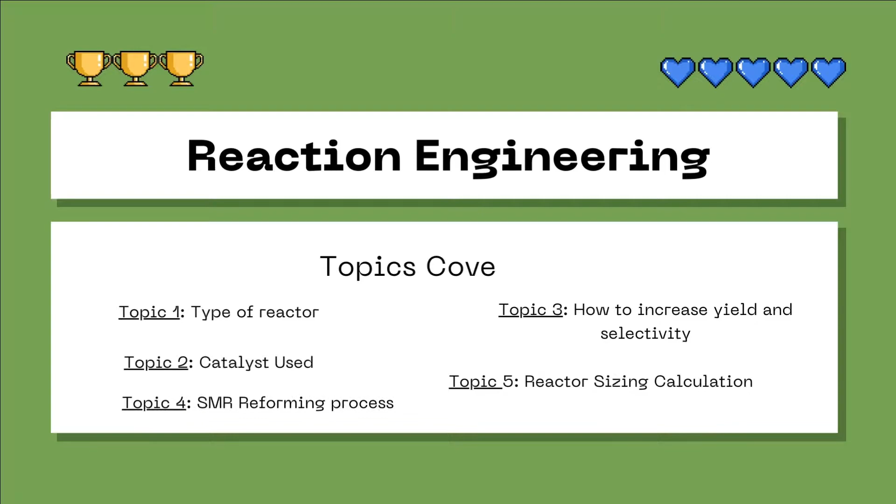For the reactor used in steam methane reforming, the PBR reactor is used in the SMR reaction because the steam methane reforming method requires a catalyst to improve the reaction, so packed bed reactors are frequently utilized for this process. Aside from that, because this project wants to produce a significant volume of hydrogen, the PBR reactor is a better choice than others because it has the advantage of forming products in large amounts due to higher contact between the reactant and the catalyst.

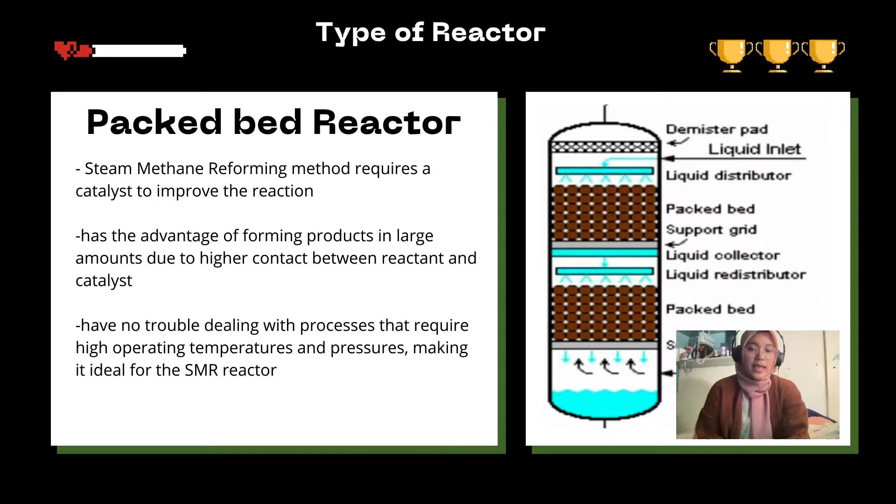Furthermore, PBR will have no trouble dealing with processes that require high operating temperatures and pressure, making it ideal for the SMR reactor, which requires a temperature range between 700 degrees Celsius to 1000 degrees Celsius, and a pressure range of 300 kPa to 2500 kPa.

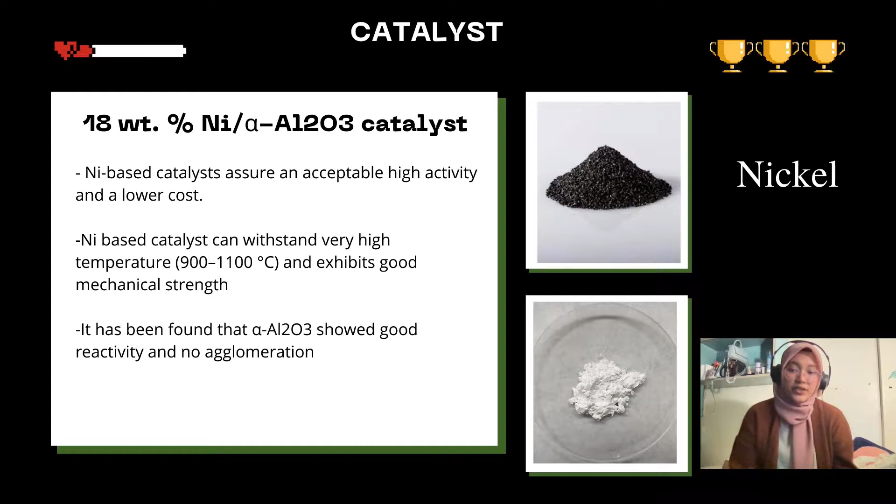Nickel-based catalyst can withstand a very high temperature, which is between 900 degrees Celsius to 1100 degrees Celsius, and nickel exhibits good mechanical strength. The use of alumina-based supporting material has been investigated extensively in literature, and it has been found that aluminum oxide shows good reactivity and no agglomeration. Depending upon the feed used, different metals and supports are used for the steam reforming process.

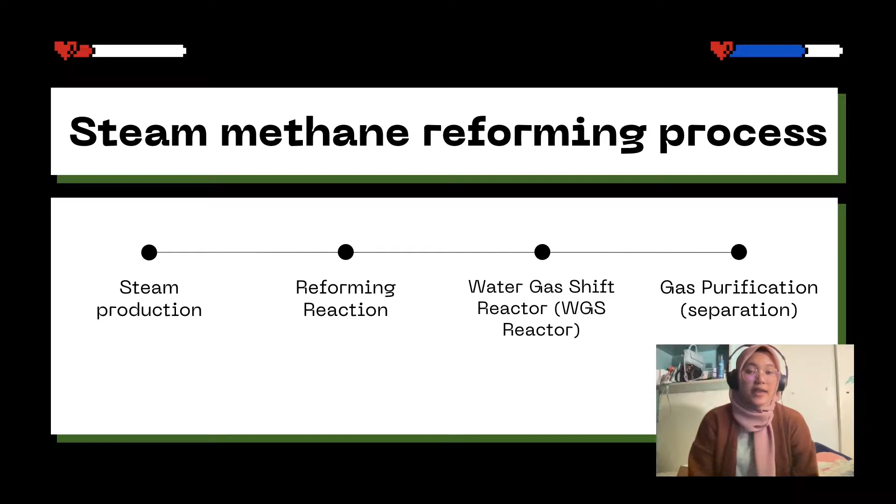Moving on to the next chapter, which is the steam methane reforming process, there are 4 significant steps. The first one is steam production, then moving on to the reforming reaction, then we have the water gas shift reactor, which is the WGS reactor, and the last one is gas purification, which is the separation.

First step, which is steam production: water must be in the form of steam at a very high temperature in order for the reaction to take place. Water enters the furnace as a liquid and is heated to a temperature upwards of 1273 Kelvin, and this high temperature fosters reaction between methane and water to capture as much hydrogen as possible from the process.

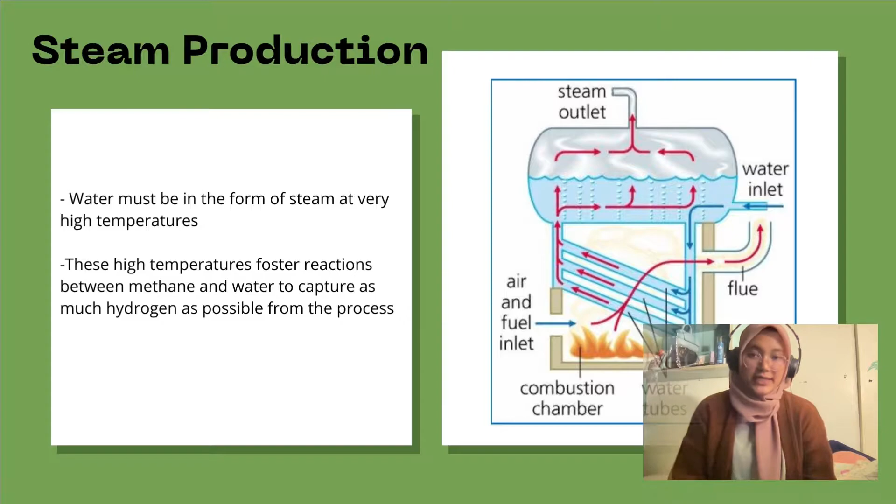For the second step, which is the reforming reaction, steam from the furnace is mixed with natural gas, which contains methane, to start the reaction, and the steam-gas mixture enters the reformer from the inlet manifold. The reforming tubes are surrounded by burners, keeping the temperature of the mixture above 1500 Fahrenheit, and at this temperature methane reacts with steam to produce hydrogen and carbon monoxide.

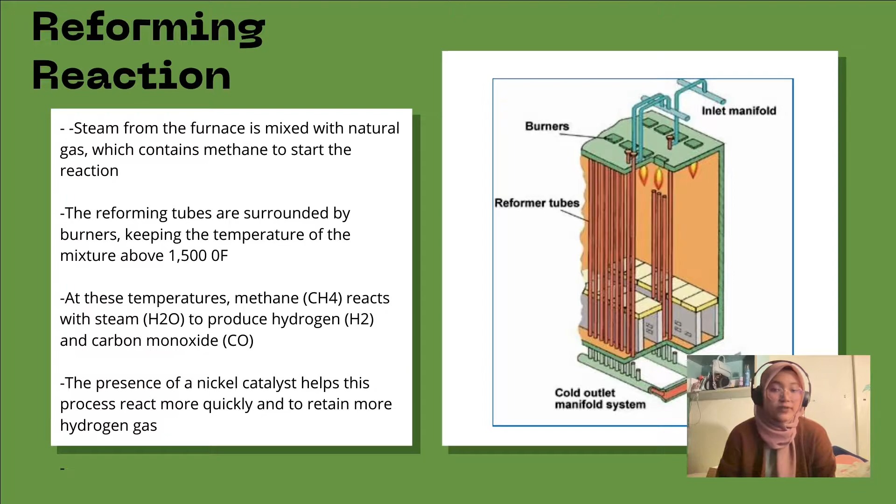The presence of nickel catalyst helps this process react more quickly and retain more hydrogen gas. The hydrogen-carbon monoxide mixture exits the reformer via the outlet manifold, so carbon monoxide is not a useful product of the reaction and may be harmful if released into the environment.

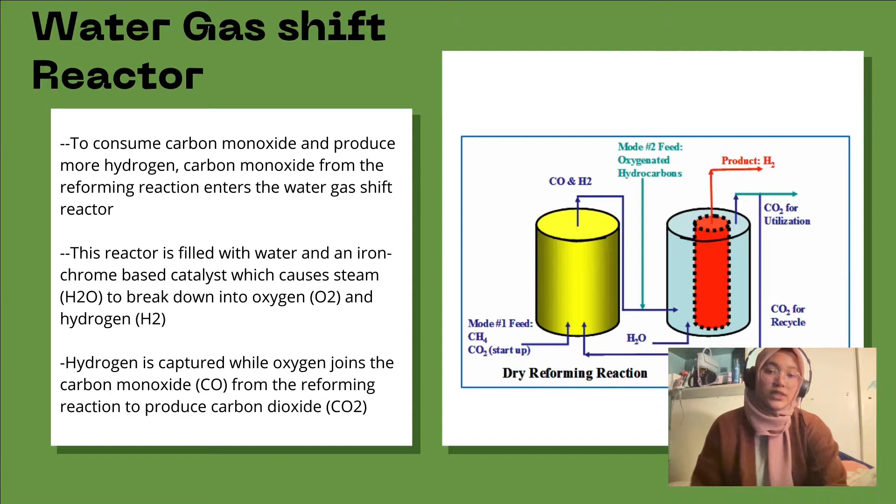For the third step, we have the water gas shift reactor. To consume carbon monoxide and produce more hydrogen, carbon monoxide from the reforming reaction enters the water gas shift reactor. This reactor is filled with water and an iron-chrome-based catalyst, which causes steam to break down into oxygen and hydrogen. Hydrogen is captured while oxygen joins the carbon monoxide from the reforming reaction to produce carbon dioxide.

The last step is gas purification, which is for separation. The gas mixture exiting the WGS reactor is not pure hydrogen and needs to be further refined to meet customer specifications. There are many ways to purify hydrogen, but pressure swing adsorption is the most common in an industrial setting. The gas mixture enters the purifier where specific adsorptive materials trap contaminants at high pressures, so purified hydrogen is pumped out of the vessel, and finally the vessel is depressurized to release trapped contaminants. PSA is used for the removal of carbon dioxide, methane, carbon monoxide, and water from hydrogen.

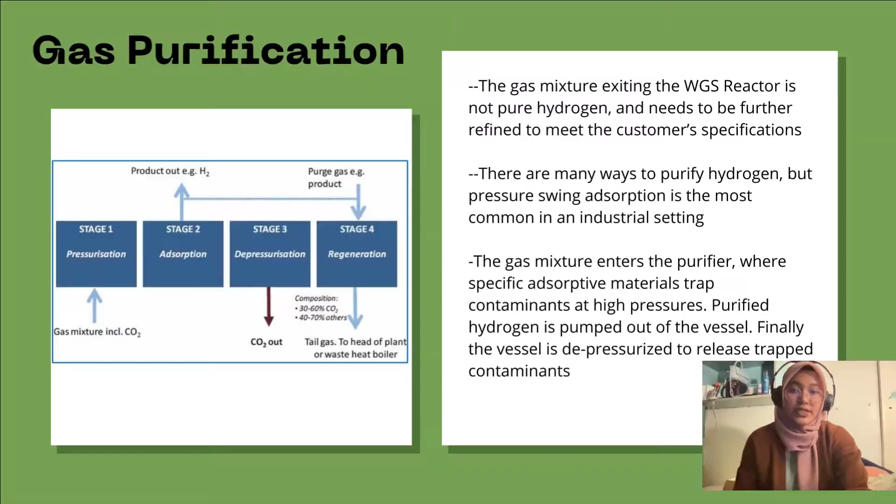Other than that, we can also increase the inlet temperature, which is the reaction temperature when the pressure is constant. Because the overall heat of reaction in this reactor is endothermic, this shows that the whole process absorbs more energy overall. So according to the principle of Le Chatelier's, endothermic reaction favors a high temperature condition.

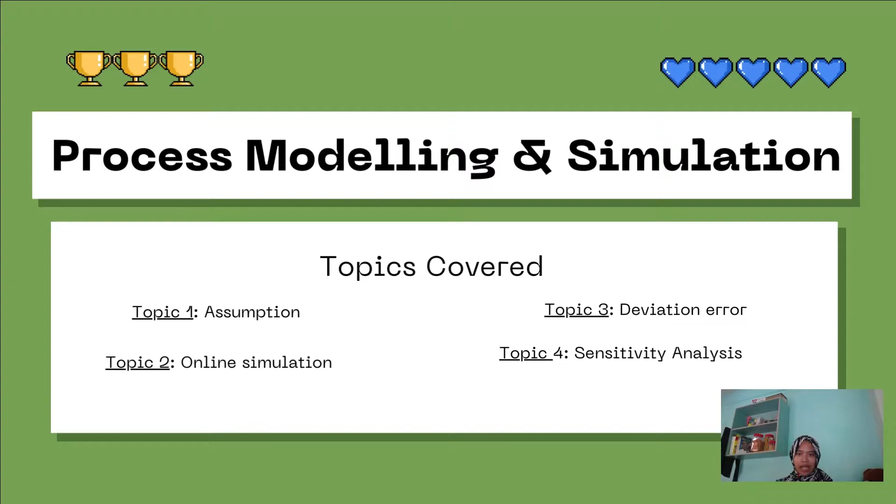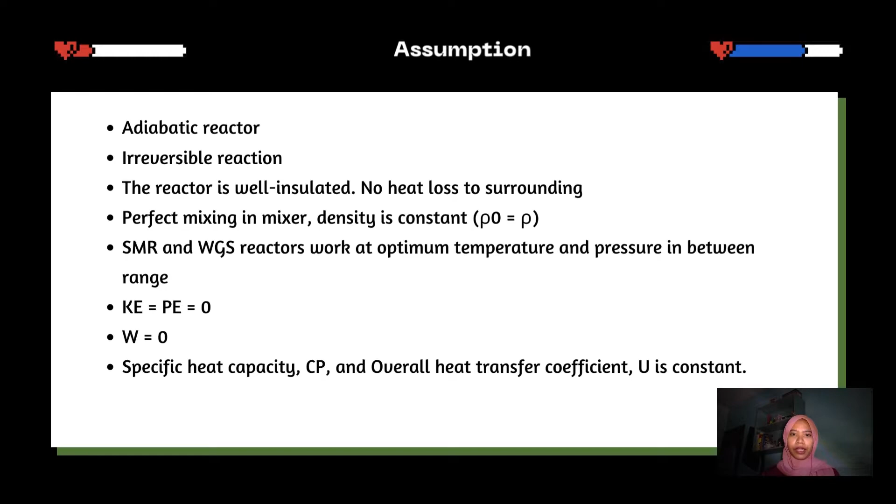To run the simulation, it is important to determine the parameter first. All the assumptions are stated below because they will affect the whole simulation results. A wrong assumption gives wrong results, as the simulation calculates based on the data that has been set up by the observer.

This is the condition needed for the feed stream for natural gas and steam, given the ratio of 1:3. Thus, we assume the mole flow of steam and natural gas to be 2000 kmol per hour over 6000 kmol per hour. Then, all the assumptions for both reactors are from reference, with a range of operating pressure and temperature.

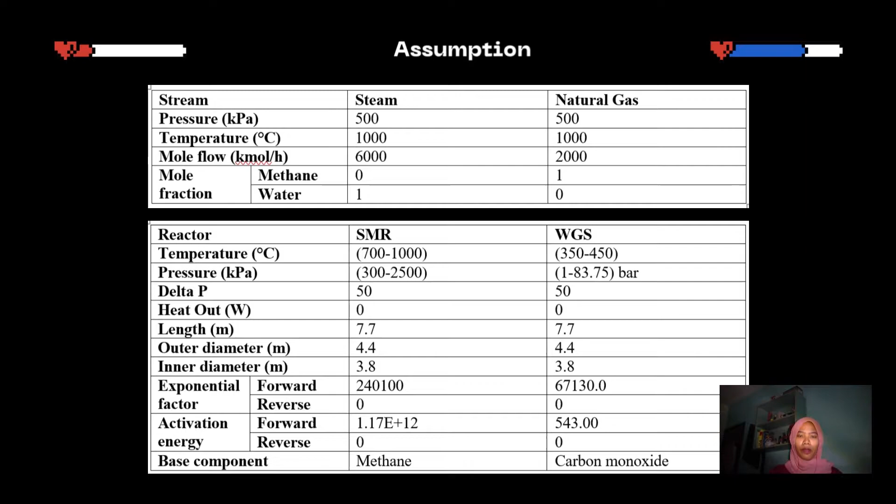Then, to match the optimum temperature for the inlet of the water gas shift reactor based on reference, the fluid is flowed to the cooler. This is to lower the temperature of the fluid, as the fluid coming out from the SMR reactor has a high temperature that exceeds the operating temperature for the WGS reactor.

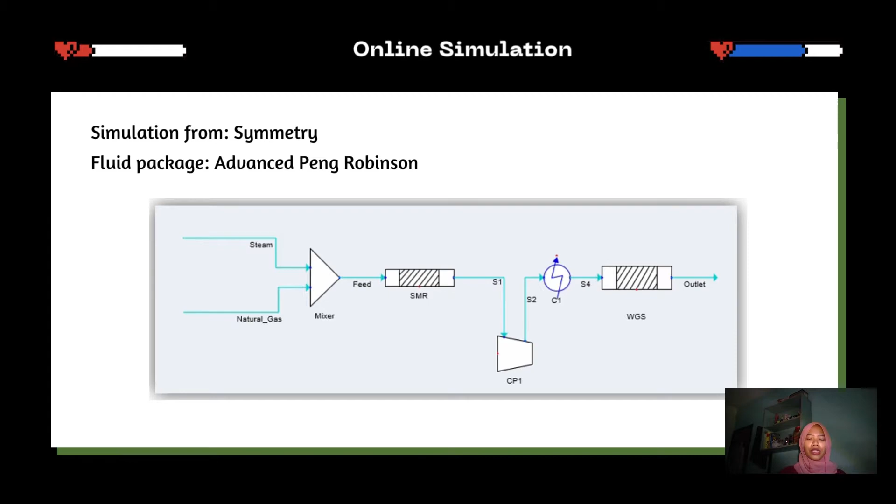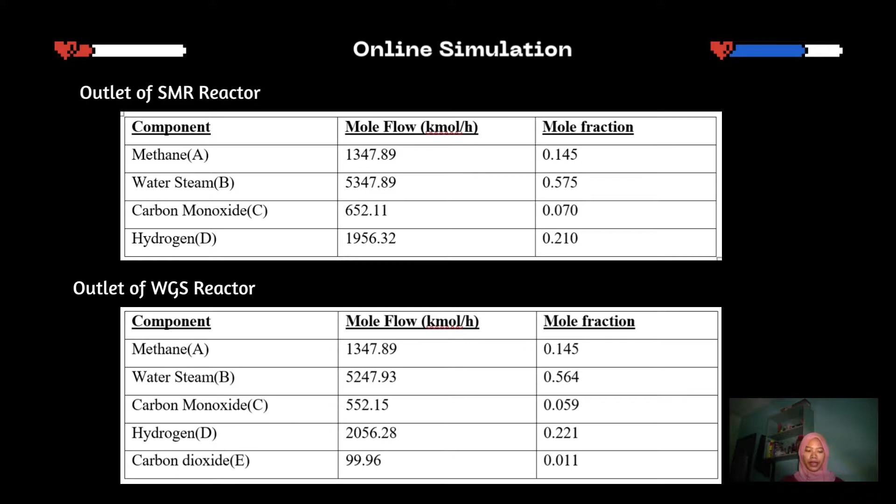After running the simulation, the outlet mole flow and mole fraction for each component for each reactor is given below. In this part, we need to validate the value by comparing the results from simulation and reaction engineering calculation. Thus, the deviation error can be calculated based on the formula given.

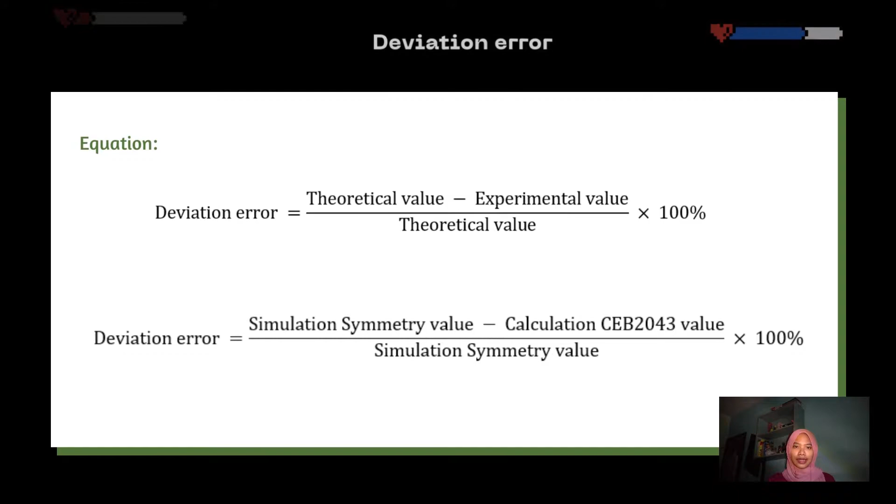The error might be due to the conversion value. As in the reaction engineering part, they need to calculate the conversion value. However, for the simulation part, there is no value assumed or shown in the PFD.

The error might also be due to assumptions made in the process modeling simulation part that were not taken into consideration by the reaction engineering part, which affects some of the calculations and gives rise to the error value.

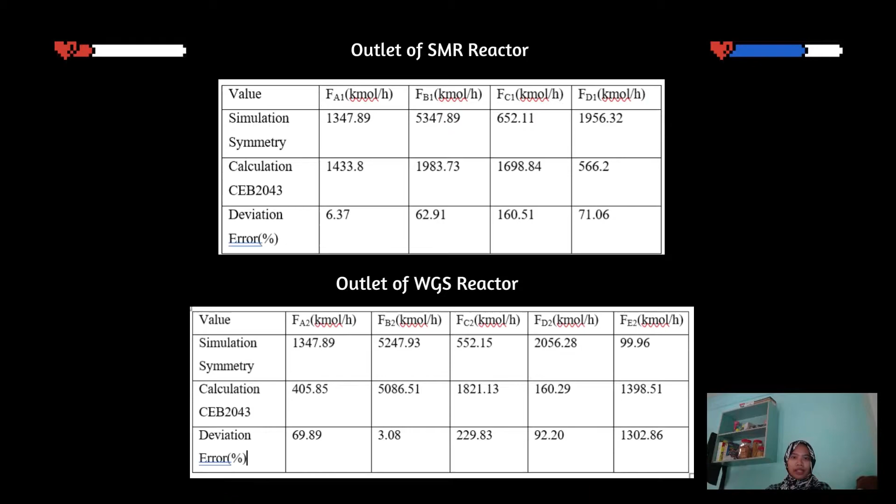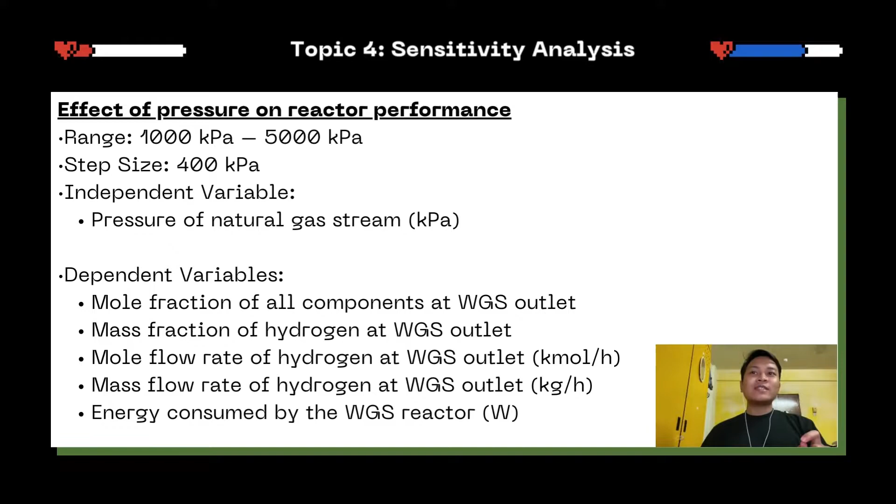The first one is the effect of pressure on reactor performance. The range of pressure is from 1000 kilopascal to 5000 kilopascal, with a step size of 400 kilopascal. The independent variable is the pressure of the natural gas stream, and the dependent variables are the mole fraction of all components at WGS outlet, mass fraction of hydrogen at WGS outlet, mole flow rate of hydrogen at WGS outlet, mass flow rate of hydrogen at WGS outlet, and energy consumed by the WGS reactor.

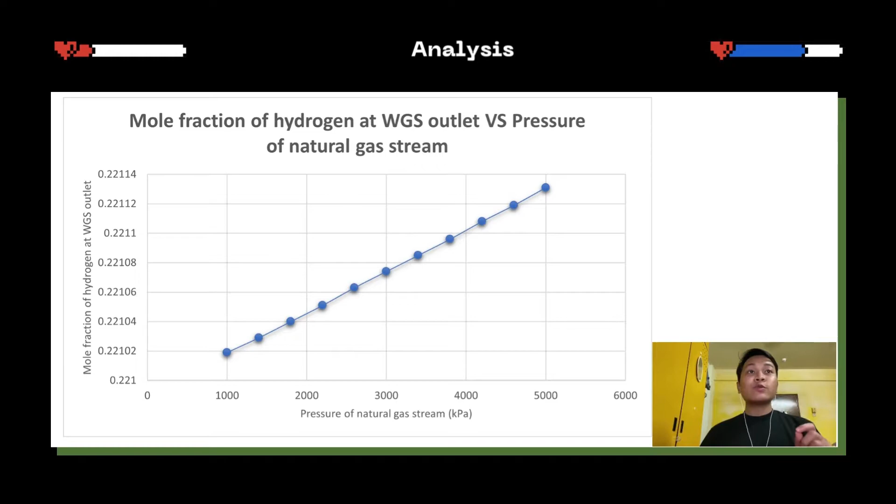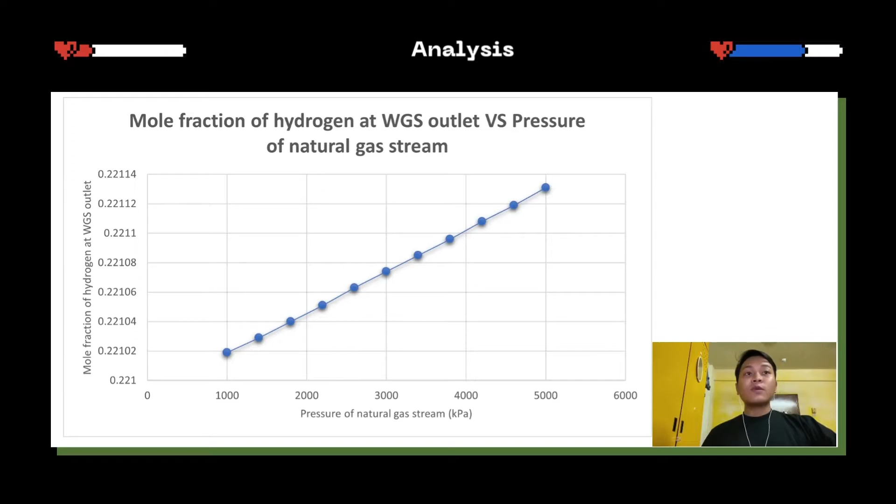The system will adjust itself to the new conditions when pressure is applied. The pressure increase causes the molecules of the components to pack closer together, which causes a rise in the temperature of the system. The packed molecules contain more molecules per cubic centimeter of the space available between them, resulting in more molecules hitting each other and the wall at a higher frequency compared to when the pressure is lower.

Although the pressure of the natural gas stream increases, the energy consumed by the WGS reactor can be seen to be constant at 5.66 x 10^7 watts. This shows that even though the quantity of product increases when pressure is increased, the energy consumed by the WGS reactor remains constant. The mole fraction of methane and water can also be seen decreasing as the pressure of the natural gas stream increases.

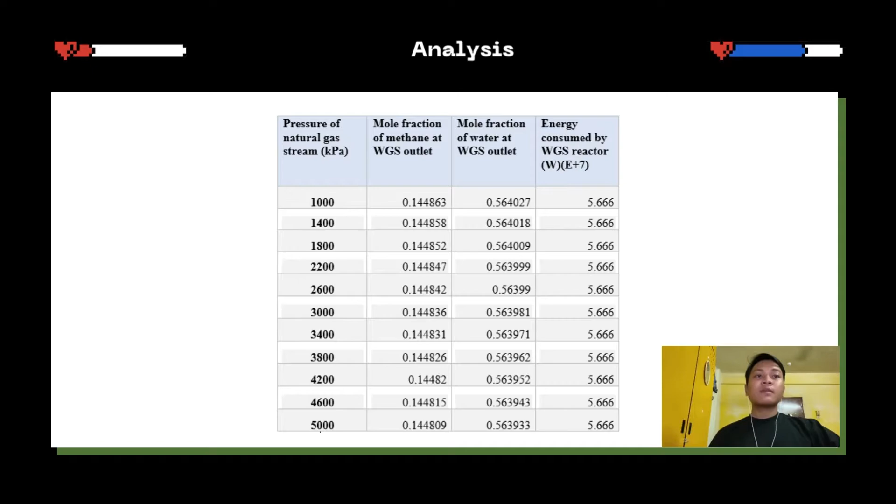The second one is the effect of temperature on reactor performance. The range of temperature is from 1000 degrees Celsius to 1500 degrees Celsius, with a step size of 50 degrees Celsius. The independent variable is the temperature of the natural gas stream in degrees Celsius, and the dependent variables are the same as for the pressure analysis.

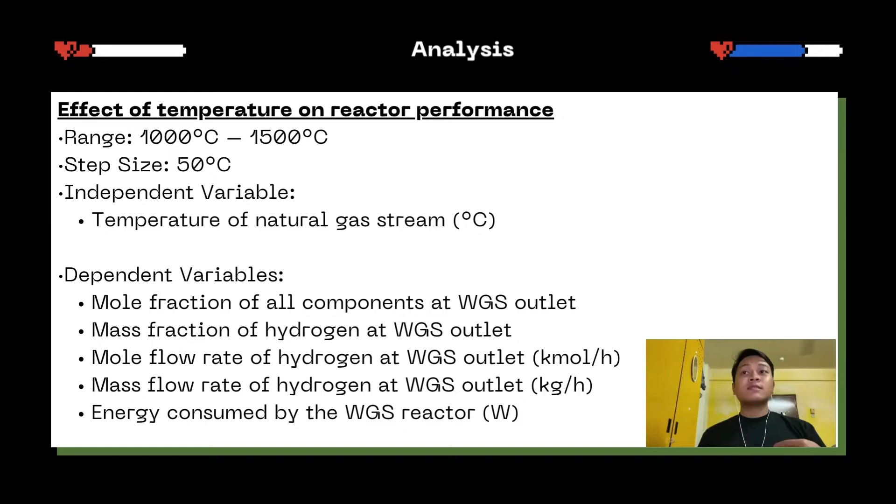This indicates that as the temperature of natural gas increases, the mole fraction, mass fraction, molar flow rate, and mass flow rate of hydrogen at the WGS stream outlet also increases. The mole fraction of methane and water can be seen decreasing as the temperature increases.

This can also be seen in Amontons' law, which states that increasing the gas temperature also causes the pressure of the gas to increase as the volume is constant. The pressure increase will cause more frequent collisions between the molecules, thus increasing the rate of reaction and product produced by the system.

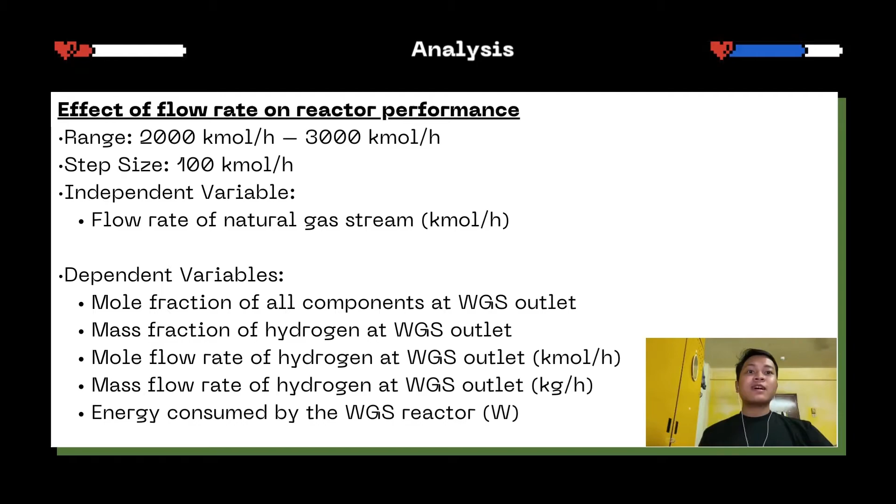So the third one is the effect of flow rate on reactor performance. For the range of flow rate, it is from 2000 kmol per hour to 3000 kmol per hour. The step size is 100 kmol per hour, and the independent variable is the flow rate of the natural gas stream. The dependent variables are the same as with pressure and temperature.

From the results obtained, we can see that when the molar flow rate of the natural gas stream increases from 2000 kmol per hour to 3000 kmol per hour, the molar flow rate of hydrogen also increases from 2056.277 kmol per hour to 2466.078 kmol per hour. The mole fraction and mass fraction of hydrogen also increase as the molar flow rate of hydrogen increases. This can be further explained when the mole flow rate of the natural gas stream increases.

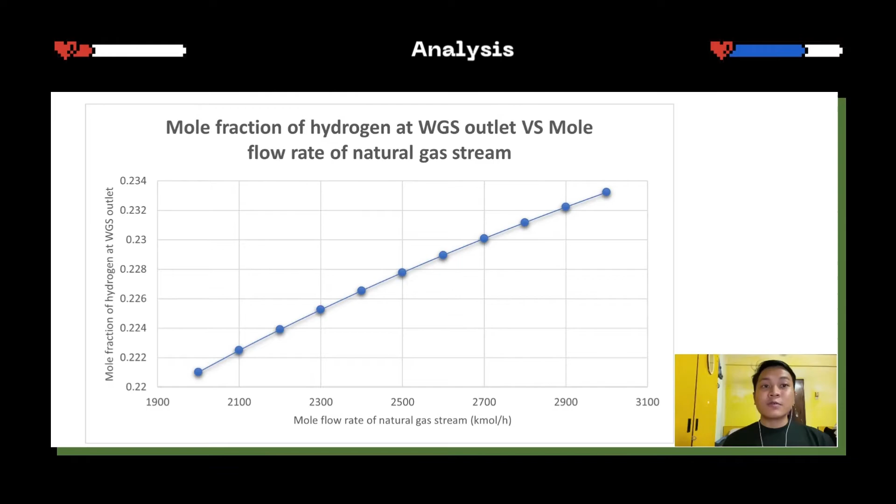The mole fraction of methane also increases as there is only methane in the natural gas stream. The relationship is as the equation below: molar flow rate equals moles of component over time.

According to Le Chatelier's principle, the position of equilibrium will move in a way opposite to the changes made to the system. The increase in pressure will cause the position of equilibrium to move to the right side, which is the product side. This is why the value of mole fraction and molar flow rate of methane and hydrogen increases as the molar flow rate of the natural gas stream increases.

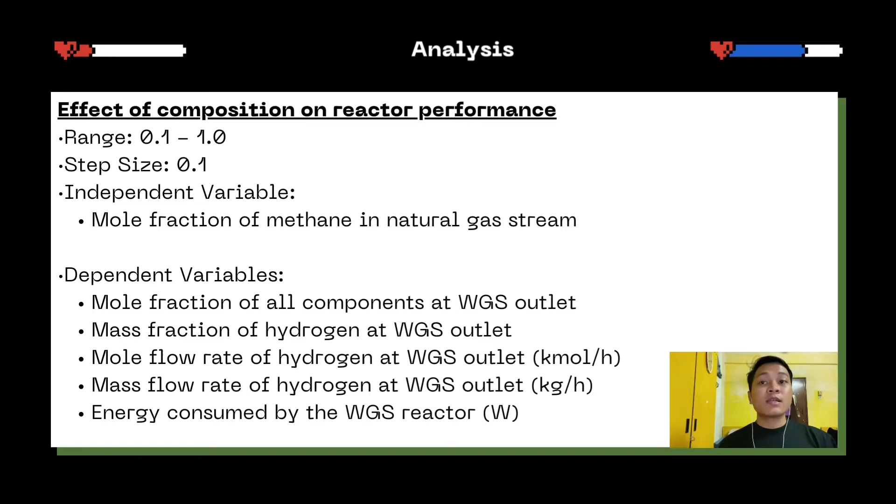So the last one of the analysis is the effect of composition on reactor performance. The range is 0.1 to 1.0 and the step size is 0.1. The independent variable is the mole fraction of methane in the natural gas stream. The dependent variables are the same across the four effects.

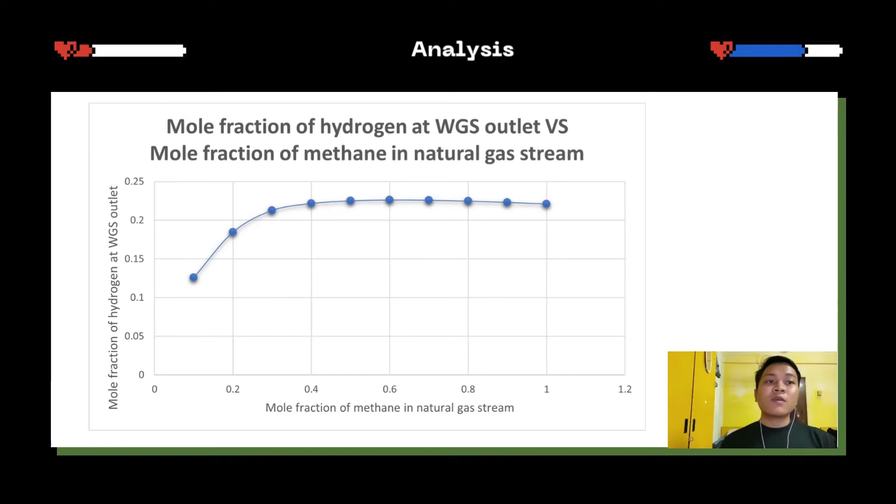From the results obtained, when the mole fraction of methane in the natural gas stream increases from 0.1 to 1.0, the mole fraction of hydrogen produced at the WGS stream outlet increased from 0.125908 to 0.221005, along with the mass flow rate, mass fraction, and molar flow rate of hydrogen. This once again can be explained by Le Chatelier's principle.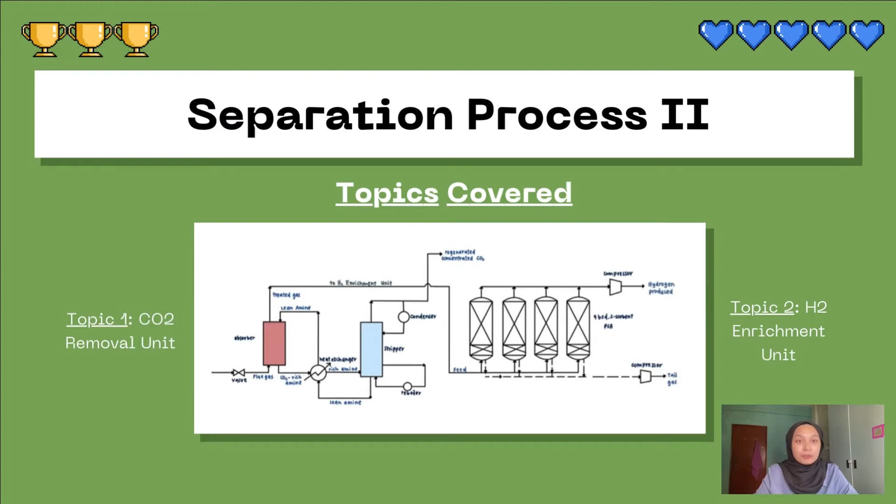Before we move to the H2 enrichment unit, there is another unit particularly placed right before the H2 enrichment unit that we should focus on as well, which is called the carbon dioxide CO2 removal unit. This unit helps to capture the carbon dioxide produced from the combustions and reactions before the stream is then released to the hydrogen enrichment unit for further enrichment.

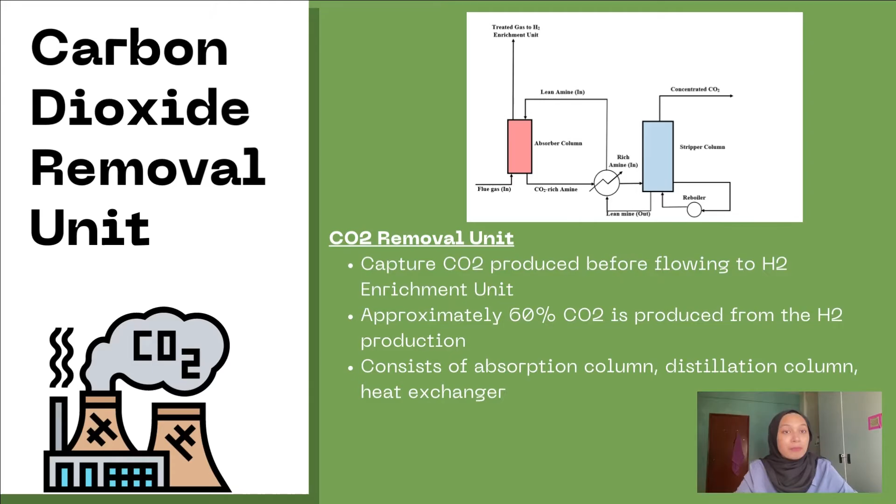The technology is decided based on the desired purity of carbon dioxide, or how much carbon dioxide needs to be captured, alongside consideration of the cost of building the plant.

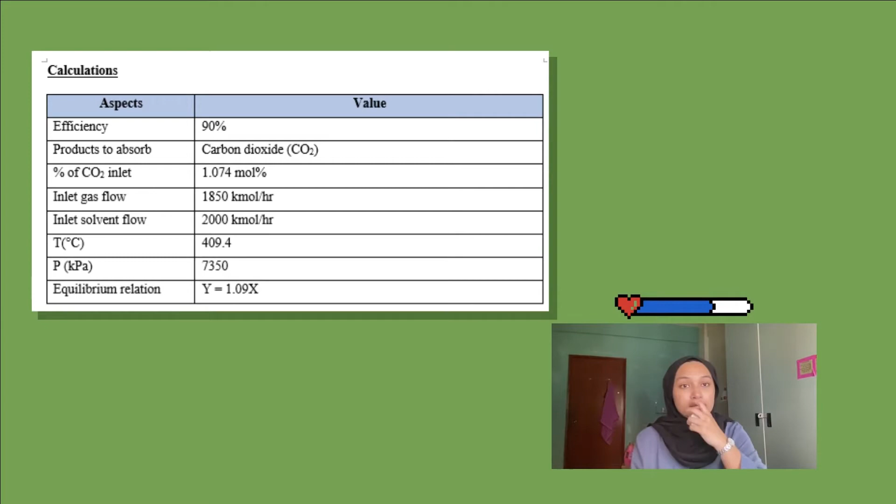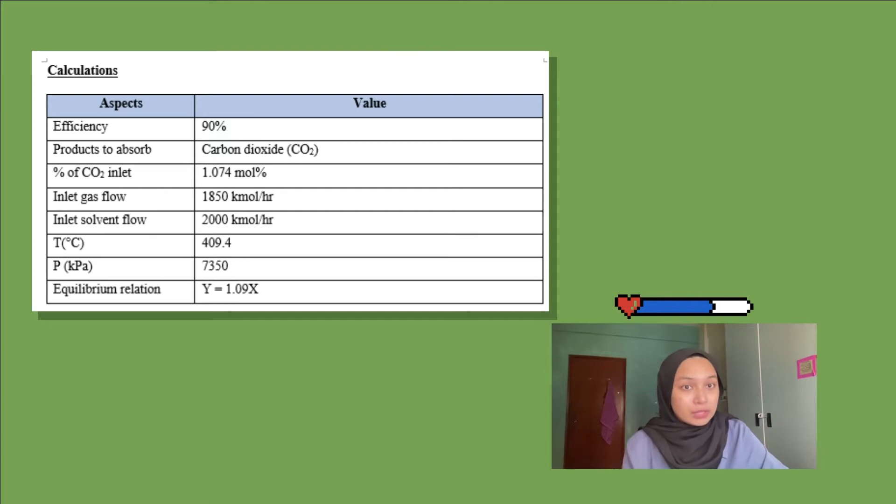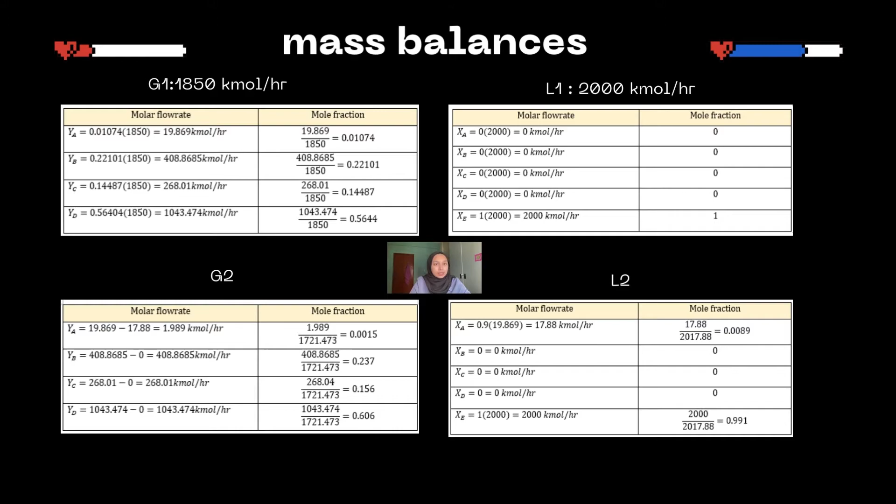First, we calculate the molar flow rate and mole fraction at each outlet using general mass balances and material balances. At G1, the inlet flows at 1850 kilomole per hour, while at L1, which consists only of pure amine as the solvent, it flows at 2000 kilomole per hour. All the calculations made are recorded in a table as shown on the slides.

We then calculate the number of stages in the absorption tower by using Kremser's equation. Aside from using Kremser's equation, the calculation can also be done by using the graphical method.

Hi, my name is Muhammad Azhar and I'm going to present about the hydrogen gas enrichment unit.

The reason why hydrogen gas enrichment units are very important in our separator system is, one, to remove impurities from hydrogen gas via adsorption. Two, since the presence of CO2 can be negligible, methane will be our target impurity, so adsorption will be used to remove this impurity, which is methane gas.

Third, this impurity system will be arranged in a series of 4 adsorption beds by 2 cycles, meaning the first 2 beds will be arranged as one cycle, and the third and fourth adsorption beds will be arranged in another cycle. This is to ensure the adsorption process of methane is as efficient as possible and to ensure a very high purity yield of the hydrogen gas.

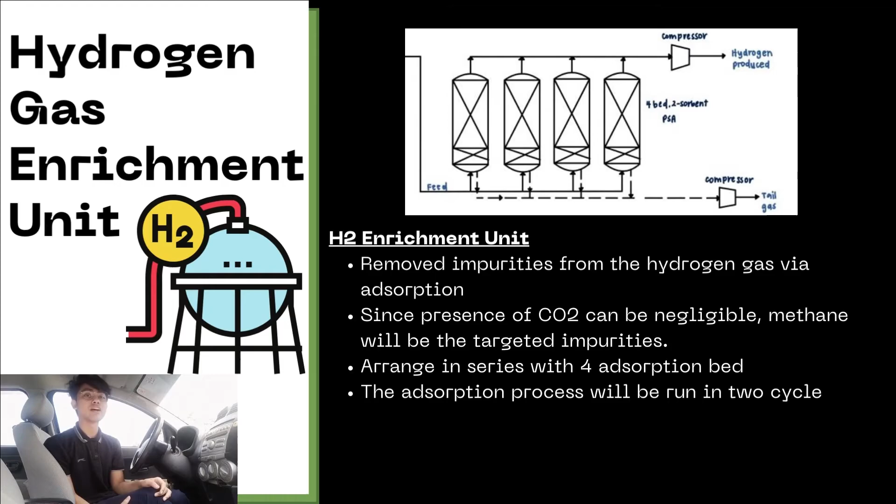In our H2 enrichment unit, we will use pressure swing adsorption. The reason we use pressure swing adsorption is it can yield up to 99.99% H2 gas. It has a high H2 recovery rate, around 60 to 70%, and it can handle a tremendous amount of volumetric flow rate.

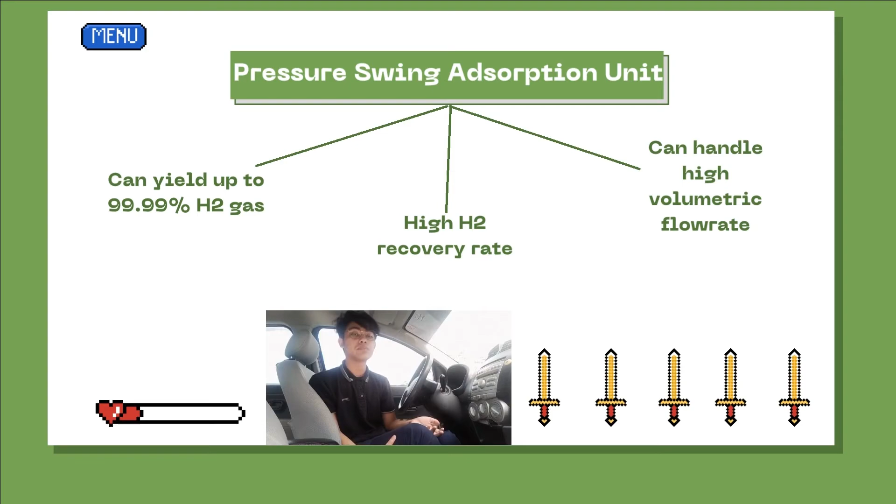In our adsorption system, the adsorbent used in our enrichment unit will be Zeolite 13X. The reason we use Zeolite 13X is because it has high adsorption capacity, high adsorbent recovery rate, and it is suitable for the adsorption of methane. Zeolite 13X is also commonly used in industrial processes.

These are the specifications of our H2 enrichment unit. Note that the bold part of the specification is actually used as part of a calculation, while the non-bold part of the specification table is based on literary material, such as the type of adsorber, bed length, and wall thickness.

The type of adsorber is determined to be a PSA unit. The bed length is determined to be 0.82 meter. The bed volume will be 0.42 times 10 to the negative 3 meter cubed. The bed diameter will be 2.32 times 10 to the negative 2 meter. The bed porosity will be 0.41. The wall thickness is 4.1 times 10 to the negative 3 meter.

The column material will be determined to be stainless steel, as it is resistant to corrosion and has a high specific heat capacity. The adsorbent will be Zeolite 13X, as explained earlier.

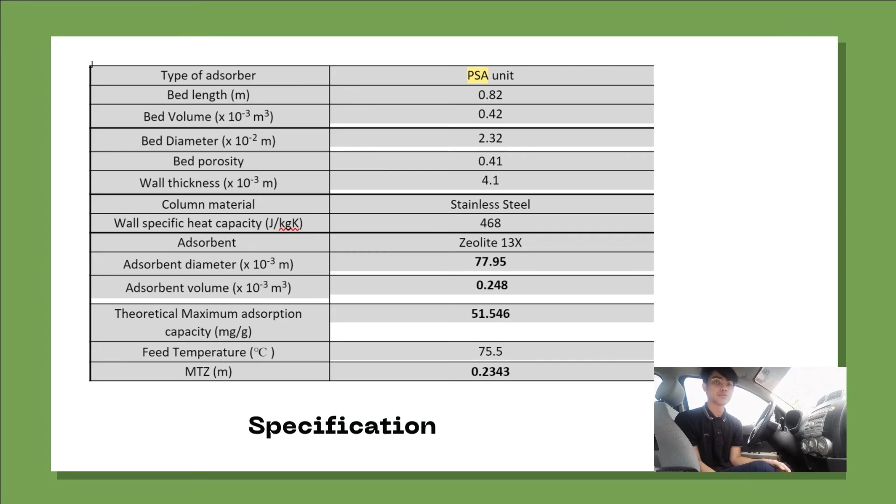And lastly, this is the calculation that has been done in order to obtain the value of the property in the bold part of our specification table.

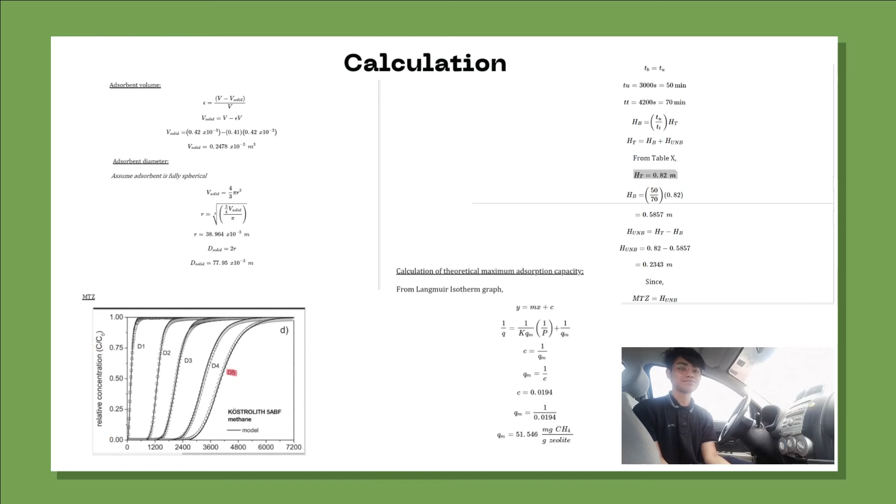I will be the representative to describe our group's reflection according to the Gibbs reflective cycle. We first divided the tasks among us via an online meeting once the question of the integrated design project was released. This is to ensure equal distribution of tasks and that everyone is clear with their responsibility and part. Throughout the whole designing project, our group members agreed that we had good communication with one another.

By utilizing the WhatsApp group function, whenever there was a problem, we would communicate through it. Our group members were very helpful and responsive, and it was very good teamwork for everyone. The project went very well since all of us contributed and played our roles very well.

Some confusion that required us to reevaluate our design happened, but we managed to pull through from a thorough discussion we had. From this integrated design project, our group agreed that we learned a lot of new knowledge and experience. For example, it's always okay to make mistakes as long as we are willing to learn from it. Another thing is that it is terribly important to play our individual roles in a group project, as it helps not only ourselves but our members too.

In the future, if we were to work together again, it would be best to start working just a little bit earlier. This is all from us. Thank you.